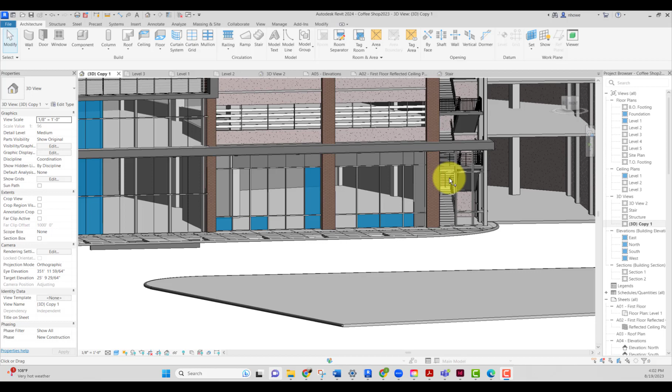All right, so the next thing we're going to do is look at stairs. Now you've built some stairs through the videos you just watched, but these are specific, the egress stairs, and I thought I'd walk you through this one because it's a little tricky. At least I found it tricky doing it for the first time, so I thought, why not?

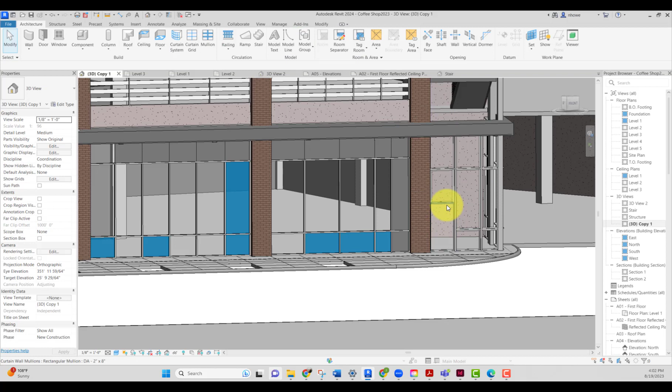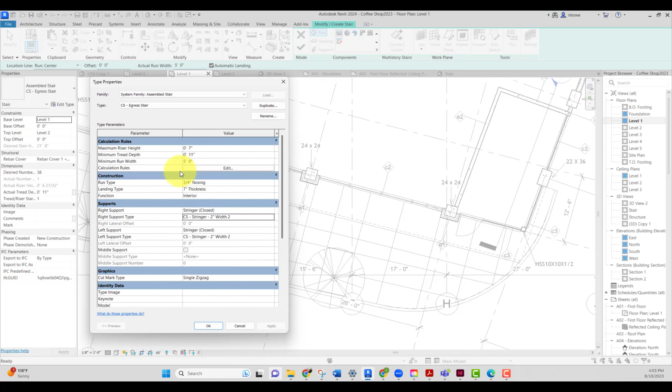All right, so I'm just going to delete these stairs as they are right now. Okay, and then we're going to figure it out. So we're going to go to level 1, and I'm going to have expected you to have already built up your stair here. So, look at your reference materials and supplements, build all of this stuff the way that it's shown, and then eventually you'll get to the railings, but anyway, this is kind of all systematic, so we want to start from the beginning.

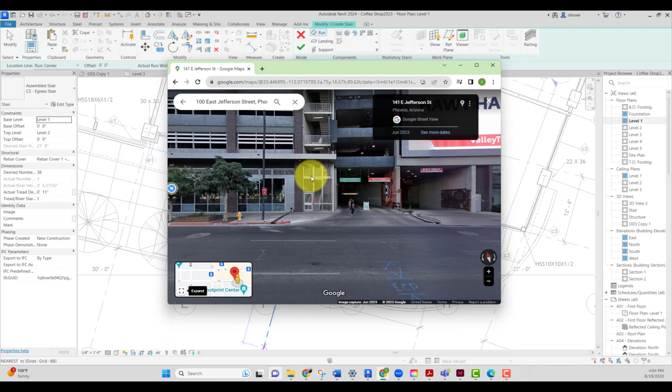This first one is going to go level 1 to level 2. If we look at the reference material, we'll see that the stair starts kind of right here in front of the door, goes up, back, up, and then it's not until it gets to this last switchback that it actually hits level 2. So a little bit to do there. So let's do it. First we're going to build our first run. So I'm just clicking and I'm going to stop right before I think I'm getting to that kind of 5-foot width from this wall.

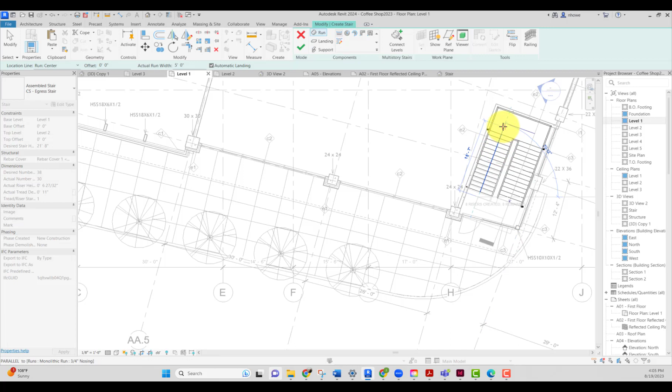And then I'm going to hit the next run and go to about right here. And I'll do the final run. Now I clicked in kind of an awkward place, but I wanted to make sure I understood where it was. So I'll have to move this one because it's not quite in the right place. So what I'm doing right now is adjusting that. I don't want it to come clear out, but I do need to make sure that I have a big enough landing for this whole thing. So that's where it's going to get a little tricky. See, I have 4'6". Need to make sure that I have at least 5'0".

So I think the way to do that would be to lose a tread on both of these until I can shrink this to just 5'0". And I'm looking for that to be kind of inboard of that column. You can see that right there. Okay. Now I have some tidying up to do because you can see right now the railing's inside the wall. So this will be a little bit of work. You can see that this one didn't get to 5'0" either. Like I said, that's why this is a bit tricky, trying to do this all using just the basic tools inside of a context. It gets a little bit tougher.

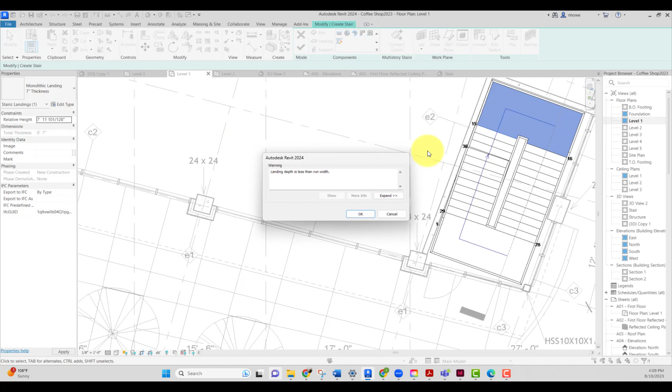So I'm getting pretty close. See that that's 5.0. That goes up. I think my problem at the moment might be the start of it is a little bit funny, so I may need to drop this down to 8 feet. So that pulled this first tread back from the door. This looks a lot better. It probably means that I'm gonna have to drop this down.

There we go. So 14 to this first landing, then 15 to 27, then 28 to 38. I think that's actually pretty good. So let's take a look. Got a few jogs and whatnot that I need to clean up.

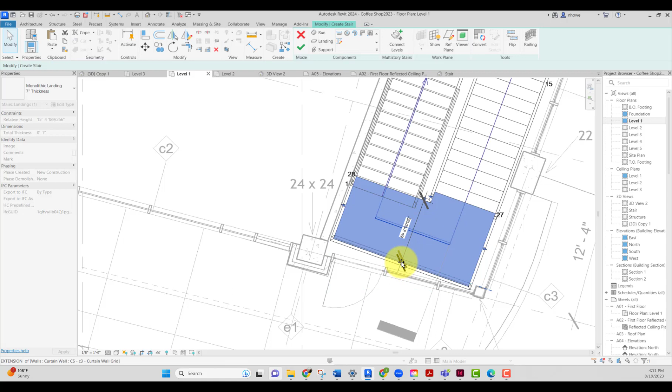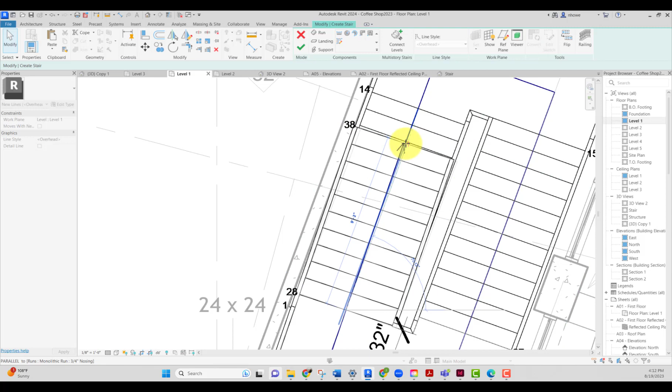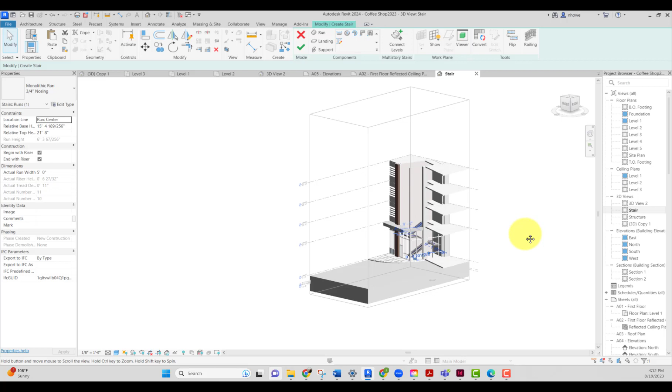I'm just touching this up a little bit. I'm gonna get it a little closer to 5.0, and get that straight with the wall. Okay, so let's look at the axon. It looks pretty good as far as that goes. One thing that you might want to use is create another axon, and I'm going to show you what this thing is. Here, I'm going to say okay for the stairs.

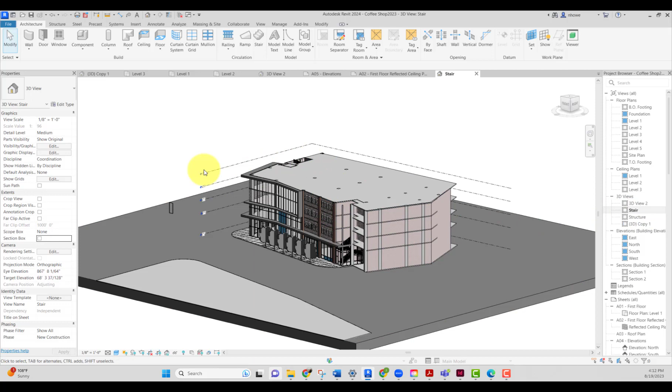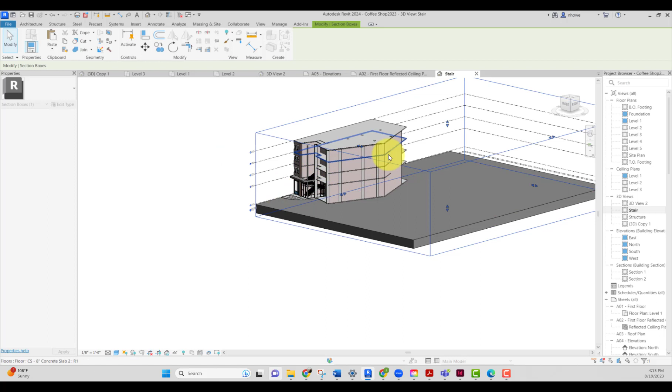So this is a section box. Let me go ahead and turn off the section box and we can talk about what's going on. If you just duplicated this, you can easily do that. Duplicate view, and you end up here. What you can do is go over to your view and turn on section box. And then it's going to create this kind of invisible box, and you can just start pulling that across your model until you only have what you want to look at and nothing more. Oof, went a little too far. This is a great tool for isolating what you were modeling at that moment. And you can see that I labeled that stairs, so now I can take a look at that.

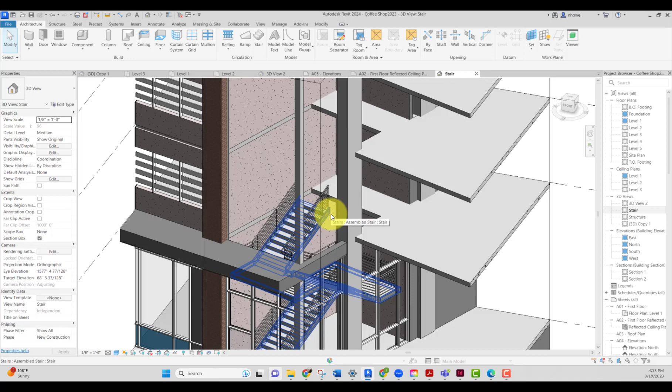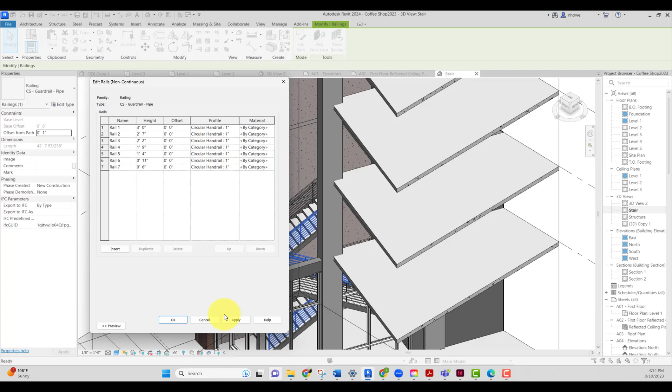All right, so if you did everything right, it should have built a railing system with this. And you should follow along with the supplements that I gave you, so you can build this to the exact specs that I have put in here. I haven't put in material. Eventually we should put in a material for those railings. But there you go. It'll have both the baluster and your railing type in there.

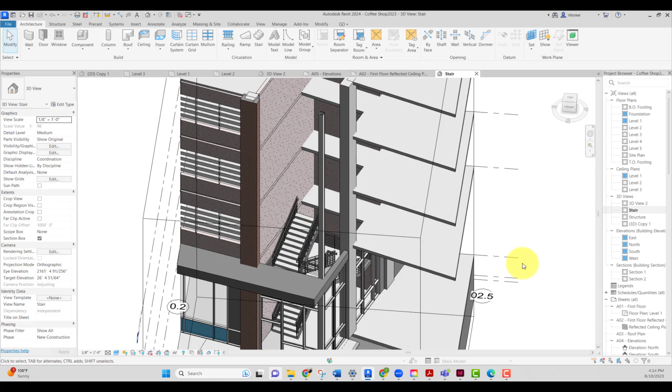Okay, so that's kind of step one. And I might want to edit this floor here to connect there. So that's step one in getting that one done. I'll do another video to get the rest of them in there because it's similar, but I actually want to show you a different tool.